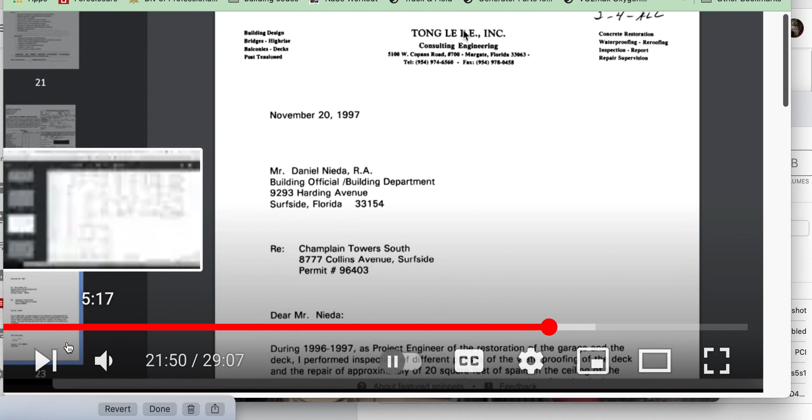Here we go. In one of my videos, I talk about Tong Le. In 1997, he did the deck, 96 to 97, a project. Here's his report, or a report. The Tong Le PE consulting engineer. Let me turn it up. For the waterproofing right here of the deck.

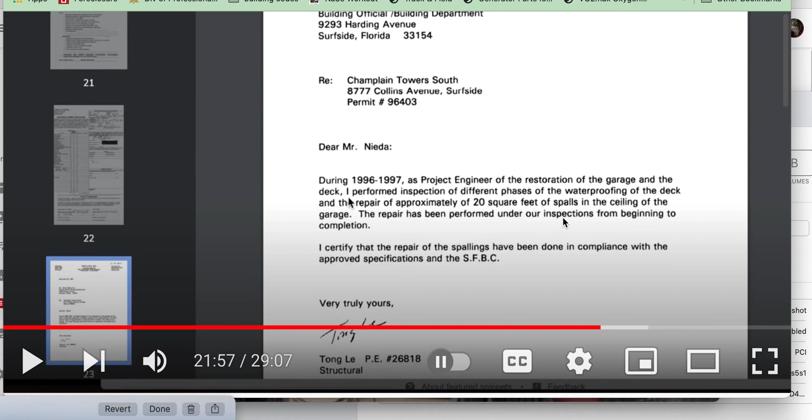So he says he did the waterproofing of the deck, and also he did the repair of approximately 20 square feet. So approximately it can be 40 square feet, right? You just expand it. Of spalls in the ceiling of the garage. The repair has been performed under our inspection from beginning to completion. I certify that the repair of the spallings have been done in compliance with the approved specifications.

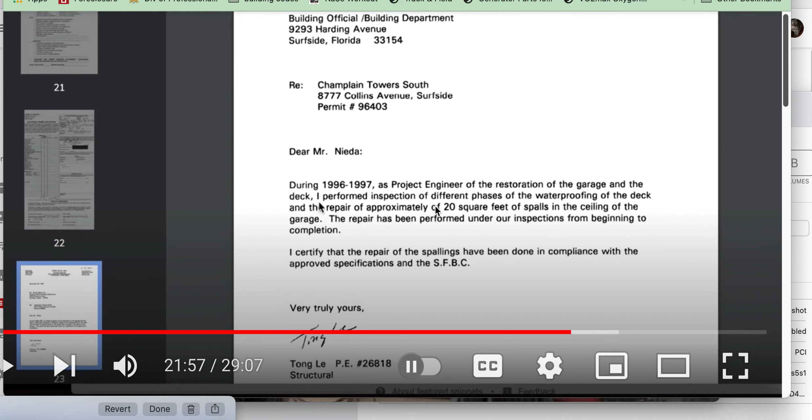All right, so he's certifying that it's done. How come this guy's not being sued? And this goes to the building office, Surfside right here. Incidentally, you can't find this document anymore on Surfside. They shut down their page on this. I tried to find it for you, but I had to go back to my own video to find it. And that's why you see me going back to some of my own videos. That page was shut down a minute ago. The FOIA page, Freedom of Information Act page.

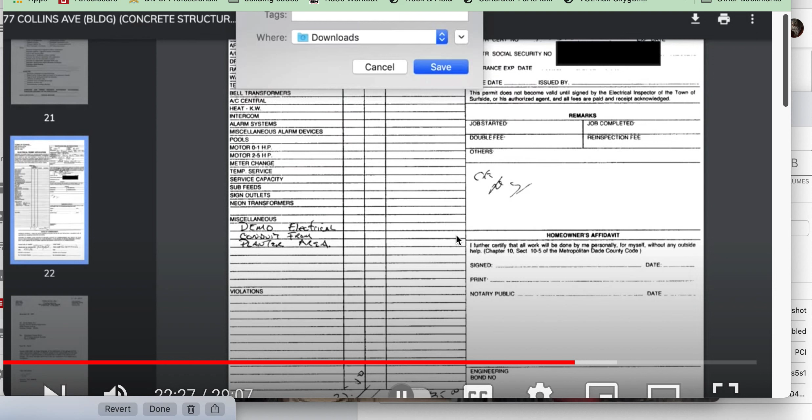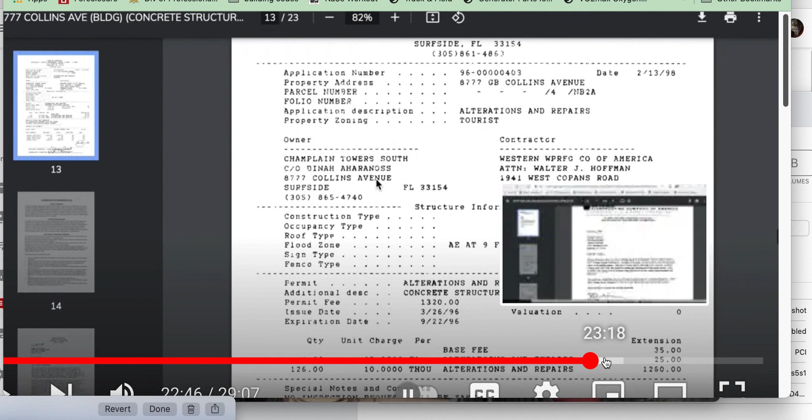So he did approximately 20 square feet of spalling. Spalling is some serious stuff going on, and he doesn't make it clear, nor do we see what exactly was done. Now I know where to find it. I got these in my downloads. One of my hard drives was defective, so maybe it's in the non-defective one. But it's under this document here, if you do find it, 8777 Collins Avenue building, concrete structural something, page 13 of 23. So this guy, Tong Le, did this work. Now let me go to the next tab over.

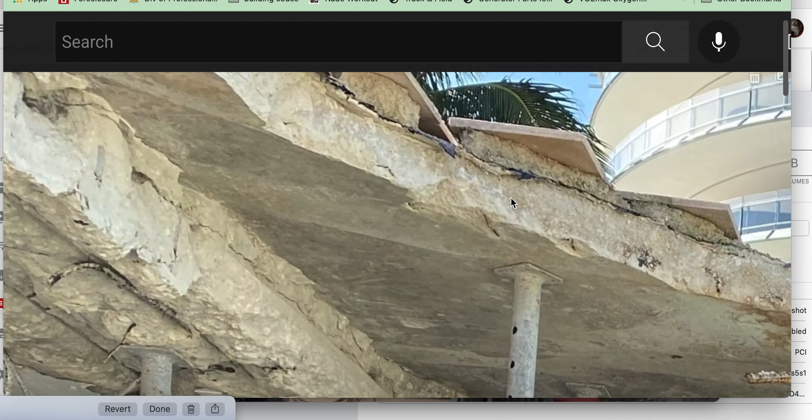So here, Tong Le did the waterproofing, and here is the waterproofing, and this tile work. Wait a minute, and that's that setting bed. See how sharp edged it is? This is quite a different type of setting bed. It's got a stiffness to it, other than sand. So there's the waterproofing. And there's like a thin layer right there for the leveling, if you will. There's the waterproofing. Look at this.

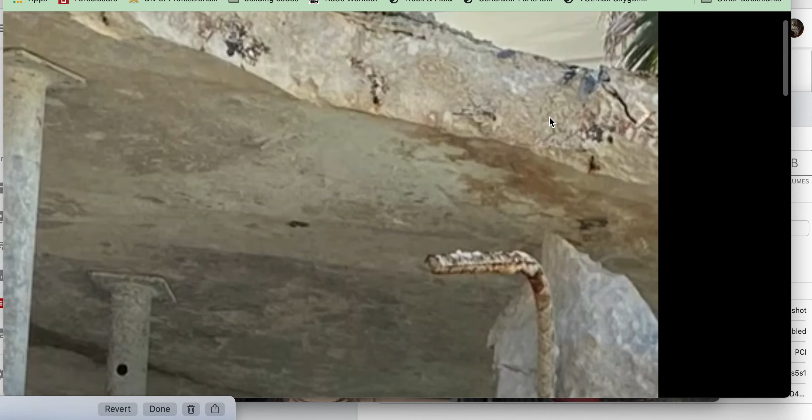So, that's the structural deck. Oh, wait a minute. That's a small reinforcement. So that's not the structural deck? Okay, let's look to the right. Play along with me here. Okay, so there's the column head. It looks like it's touching the structural deck. Oh, wait a minute. If this is the structural deck, then what are we looking at here? Is this multiple decks right here? Well, they look about the same aggregate, so let's see if we can make those come back together somehow. Think about rebar pulling them apart.

And if we just slide over a little bit, it looks like we can see right about here, it's a continuous section right there. So that appears to be the structural deck here. Some rebar unzippered at the underside of it right here, and ripped it down and ripped it off, and laterally too here, and gave this fracture line like that. Gives the impression of multiple layers. This is probably just the structural deck, one layer.

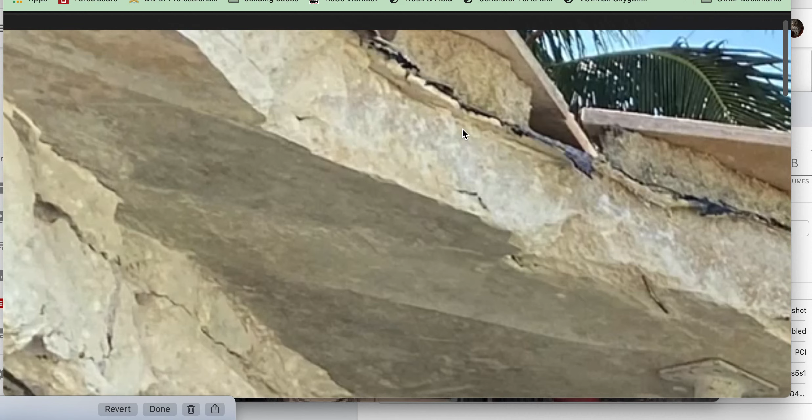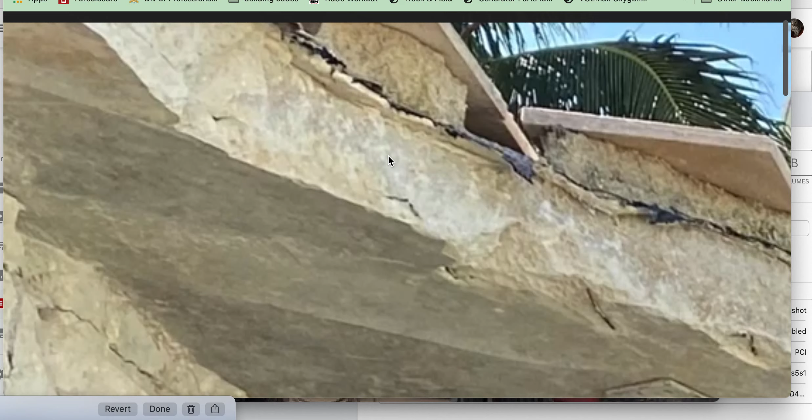Oh, but my gosh, this deck was designed for 40 pounds per square foot, and look what we have above it at some points of this deck. Look how thick that is. That's friggin' amazingly thick. It's profoundly thick right here. And then you have this bed, and then you have the tile. So if we're looking for sagging, this is the back area also, by that pool area. So then we have those sagging areas. This is near my butterfly.

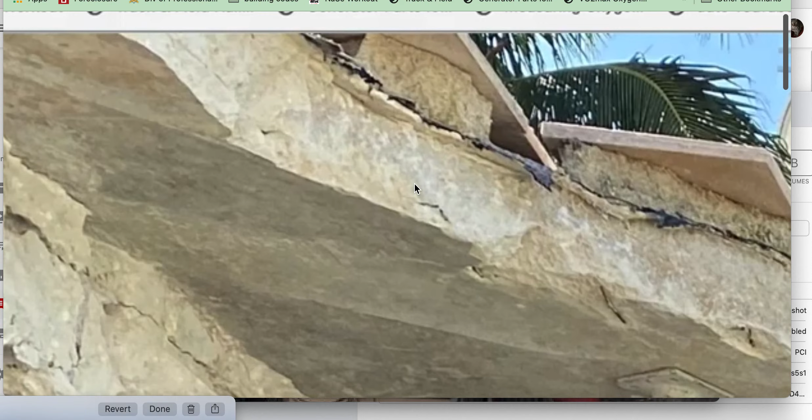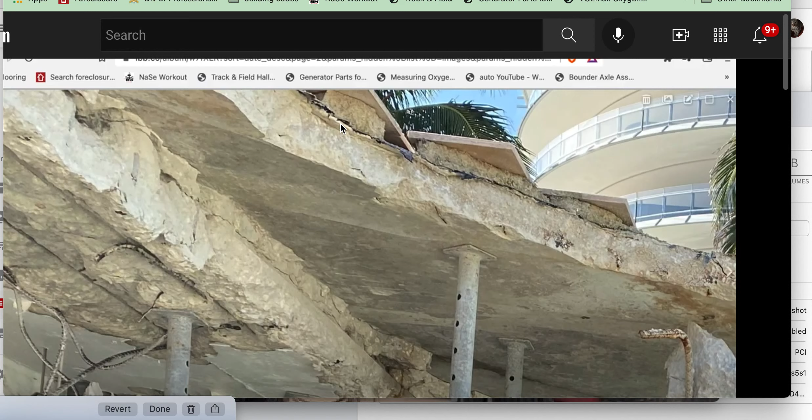You should far exceed that. This is about 9.5, and then there's a little bit of silliness here with this tile, which they don't show in the sample. Looks like it's showing one sample though. They don't show the waterproofing either. But over here, they would be coring for days. Look at that. Look at this monster. All right.

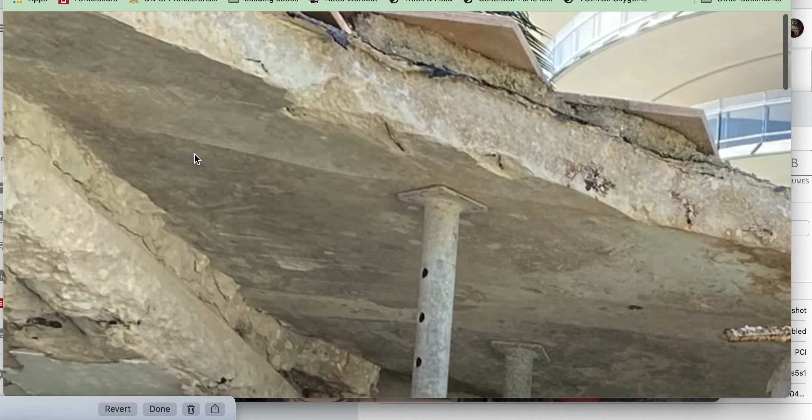So this is the profile. If you look under here, as the mortar was placed, they either profiled the deck, cleaned it, and then this is the profile of the deck after they cleaned it. And that's the mirror image, if you will, of it. It's kind of interesting. This is the underside of it. What you should take note of, though, is you don't see water stains. So this waterproofing worked over here. Over here, it looks like it worked, and we don't see the blistering over there.